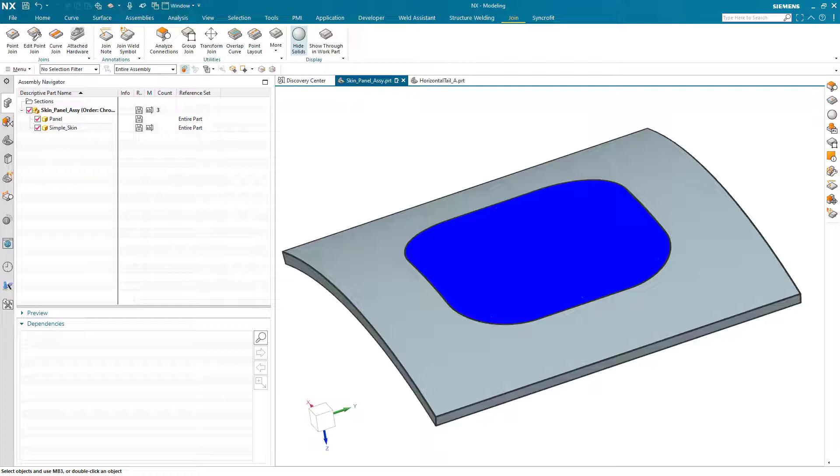In that type of application, the technician would not have access to the back side to be able to hold a typical nut or collar in place. So this is a good place to use nut plates. You'll notice if I hide the panel, you can see that the skin is recessed where that's going to sit to allow us a nice smooth surface. And we have some points already laid out that would be the locations where we would want to put some bolts through to attach that panel to the skin.

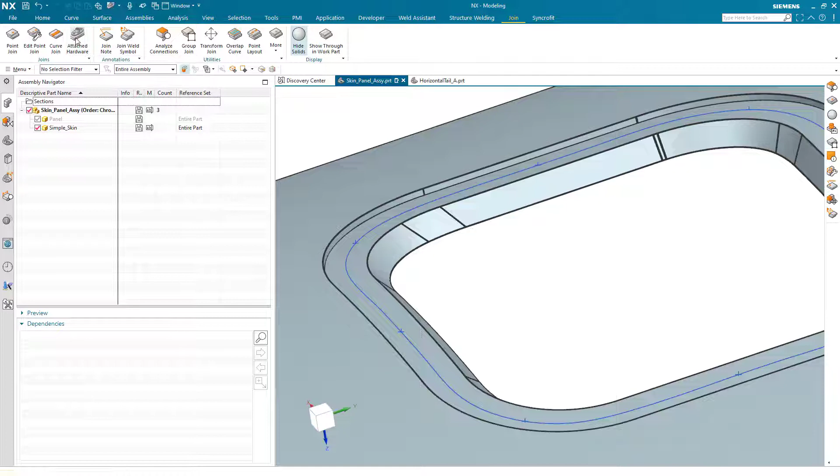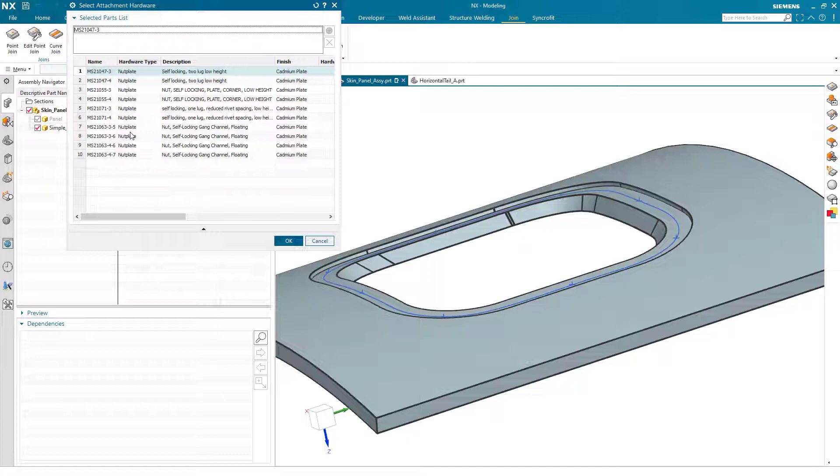We'll begin the workflow by first defining the nut plate itself. So we start first by choosing the points where we want to apply the nut plates. Now in this case, we don't actually want the nut plates to be on the face where the points are. So what I can do is then select the back side as the attachment face for them. Next, I choose the preferred hardware. I have several examples of different styles of nut plates and gang channels here, but what I'm going to choose is a standard 2-lug nut plate.

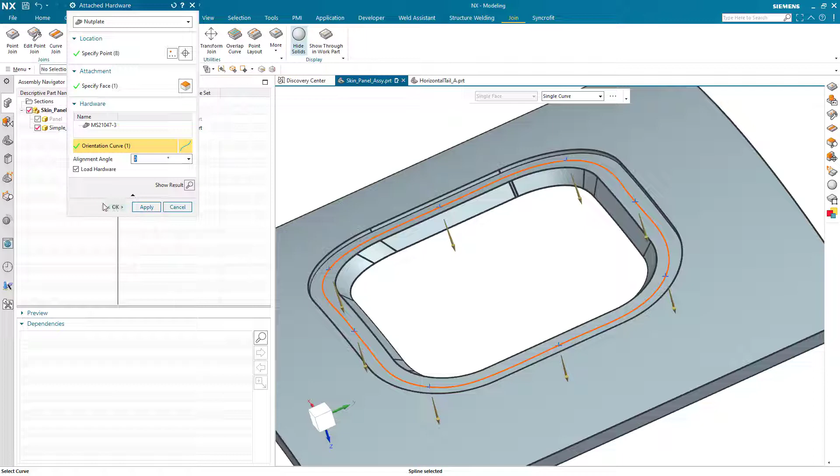Next, I choose a curve to basically line the lugs of the nut plate up. Basically what we'll do is we'll take the point, we'll take the tangent direction from the curve, and that's going to be the orientation for the nut plates when they're brought in. So if we now spin the part around to the back side, you can see now that the nut plates have been loaded and placed on the underside of the part.

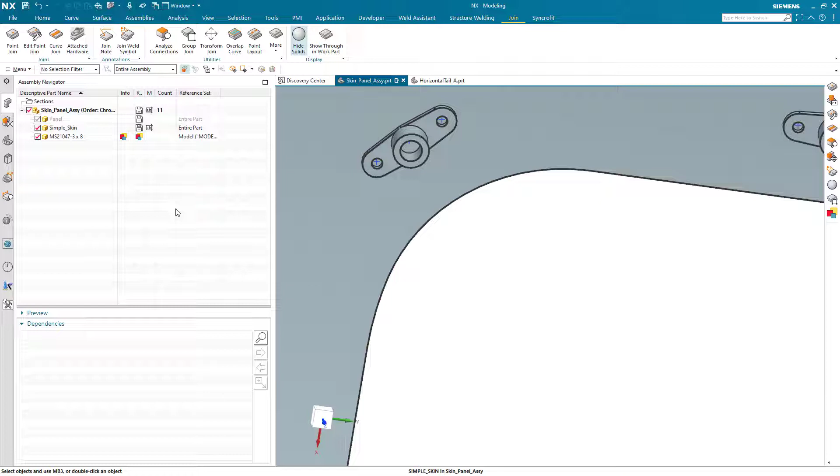You'll notice that in addition to loading these nut plates, we also have some additional points that were created. This was done automatically when the nut plates were loaded. Basically, our database has some information that tells us how far, relative to that center location, the rivets are going to be that attach this nut plate to the skin. If we take a look at the feature here, you can see on each of these we have these rivet points that have been added. That would indicate where the nut plates are attached.

So now, let's define the rivets that will be used to hold these nut plates in place. We have a new subtype that we've introduced in the point join command for the nut plate rivet. One unique thing about this particular subtype is when I go to select my connected parts, I only select one. Our focus immediately goes to choosing the points because we don't have to worry about multiple parts that we're attaching here. We're simply trying to attach the nut plates permanently to one part.

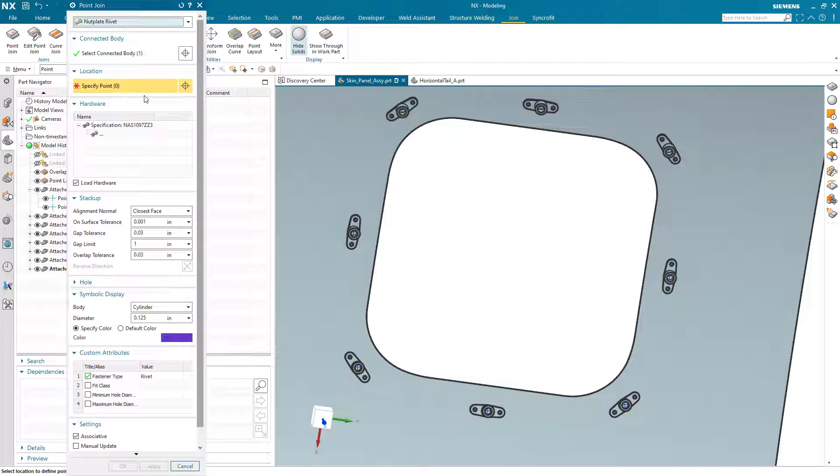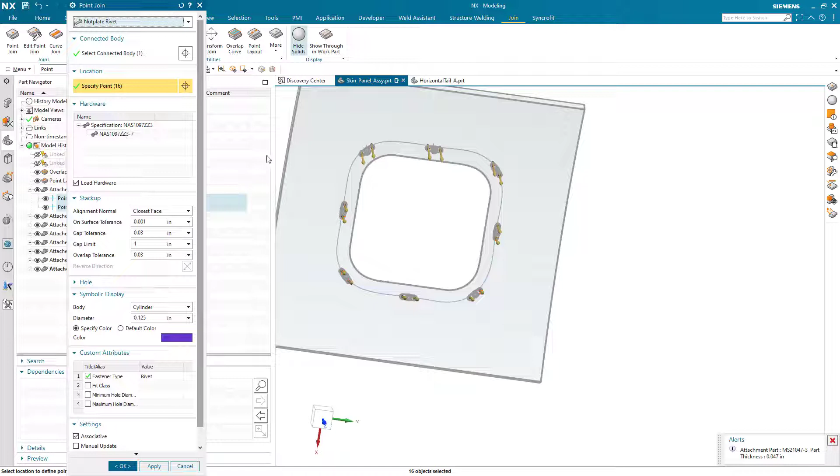Next, when I specify the points, I can go ahead and do a trap select. And we intelligently recognize that some of the points that may have been captured here were actually used to define the nut plate, so we can filter those out. All we really want is the rivet location. So you can see I've got the 16 rivet locations and we've ignored those center points.

I can define my hardware. I've got a specification for a nut plate rivet. And it's sized basically taking into account the thickness of the skin at this location plus the thickness of the lugs of the nut plate. And that's how we end up with the -7 rivet.

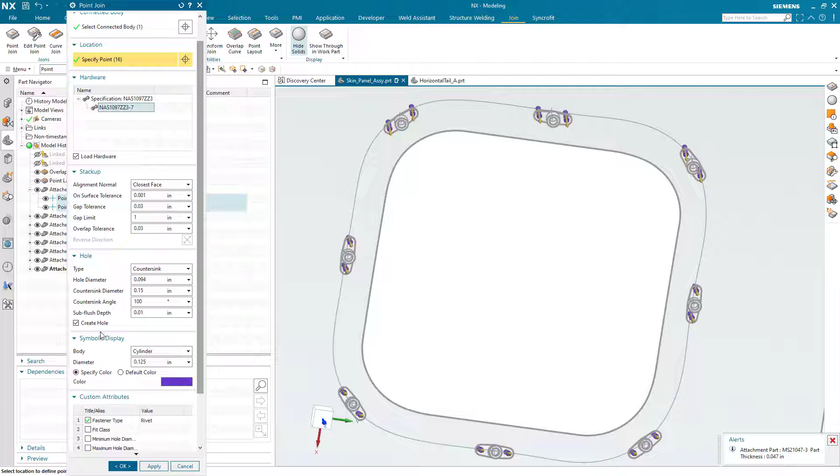Go ahead and create holes for these. And one thing we'll do here is we'll add a small subflush so that when the panel comes back in, you don't have to worry about the fastener protruding in any way, so that the panel can sit flat on top of the surface of the skin. As you can see here now, we've got the nut plate rivets loaded in place. They're sized appropriately. You can see we've got our countersunk holes and a small amount of subflush, again, to ensure that those don't protrude at all.

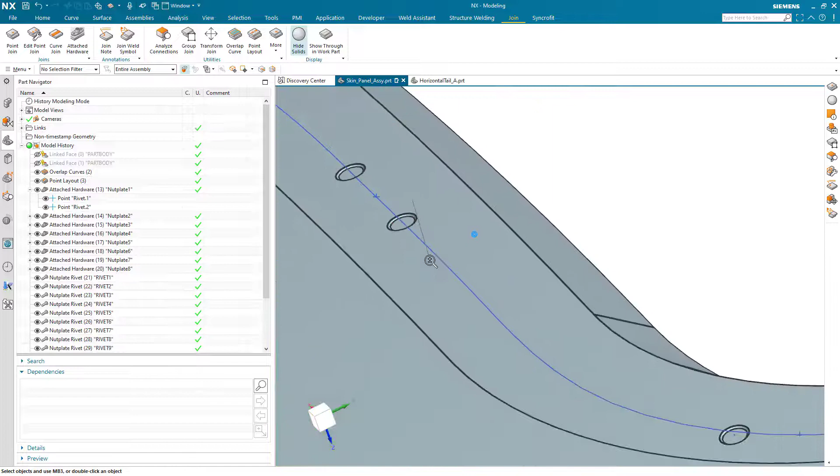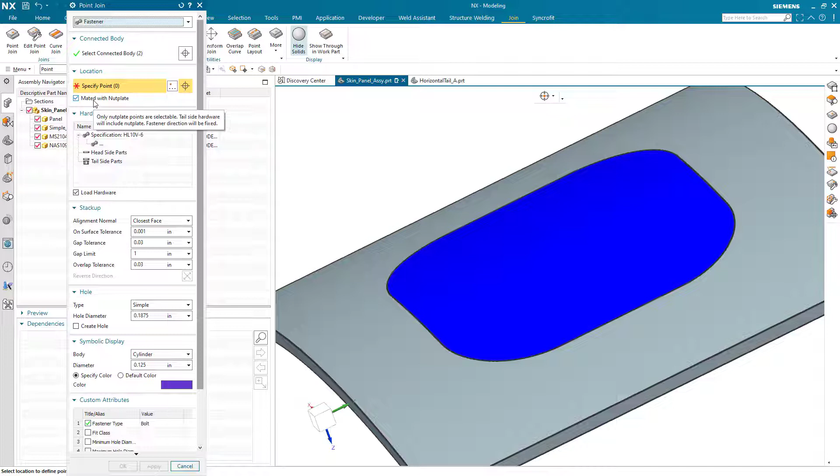At this point, we can bring this panel back in and now define bolts that would then be used to attach the panel to the skin. Go back to the point join command, change my subtype to fastener, select the two parts that I'm trying to connect here. Now when it comes to specifying the point, we have another option here, which is whether or not it's mated with a nut plate. In this case, I do want to use that nut plate as the tailside hardware.

So now when I select, once again, here we're going to ignore any of the rivet points. And we're only going to grab the points that were used to place the nut plates in the first place, because that would be what the fastener is going to line up with. You'll notice that when I do that, it automatically assigns the nut plate as the tailside hardware. Users can't modify this, and that's because the nut plate has already been defined. That's really what drives the hardware that's going to be used at these locations.

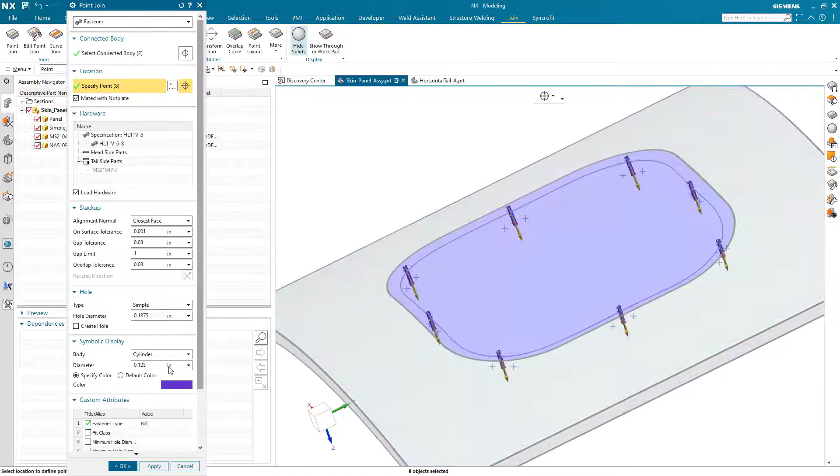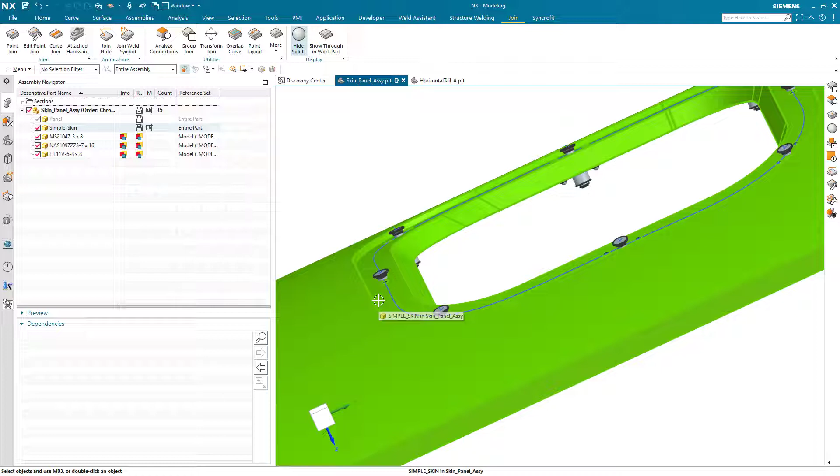I'm going to switch my specification to use flush bolt. Let's go ahead and create that. So you can see now we've got our bolts loaded in place. We've got some countersunk holes that are placed there, so we have, again, a nice smooth surface. Of course, we've got those rivets that have already been added. And so now we've fully defined the nut plate, the rivets that will attach it to the skin, and then finally the bolts that can be removed in order to allow access inside of the panel.